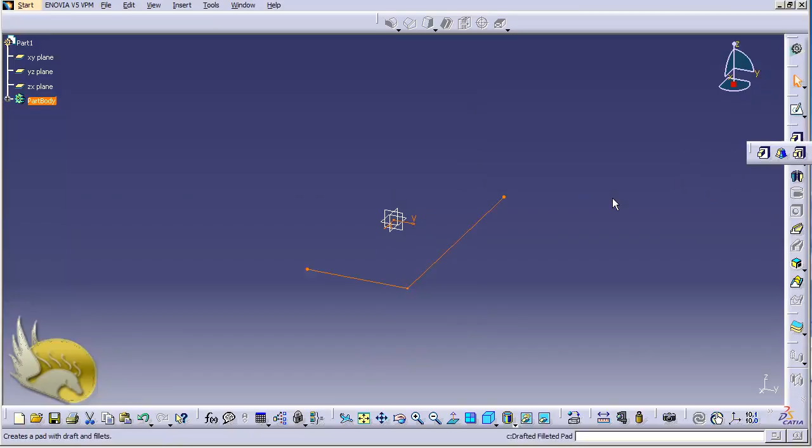Now let's see how we can use padding to add some material and take this to the third dimension. I go and click on Exit Workbench right here. Whenever I start padding, you can see this dialog box that tells me I cannot pad this unless I select the thick option in the padding tool.

I accept to select the thick option by checking this, and you can see that now I have two different limits. Now I can add the first dimension, about 20 millimeters. That's okay for me, and you can see the selection is Sketch 1. In the second limit, I want to have about 20 millimeters, and you can see that this goes to the downside.

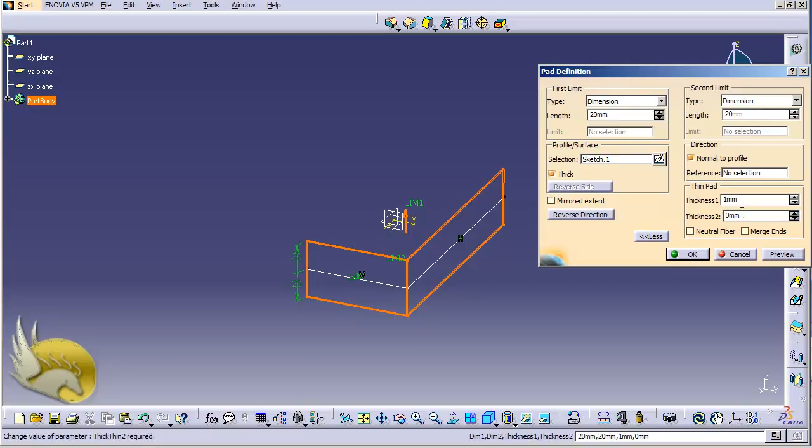But the thickness is very important here because we are creating a thick profile, so I can add thickness in two directions. The first thickness is in one direction, and I'm going to have this about 5 millimeters. I can add the second thickness in the other direction. You can see that this is going inwards, and I'm going to have about 5 more millimeters outwards.

You can see that I have an indented line that tells me this is the profile I have, and I have thickness in both directions. This is not necessary, of course, to have thickness in both directions, but I prefer to have this.

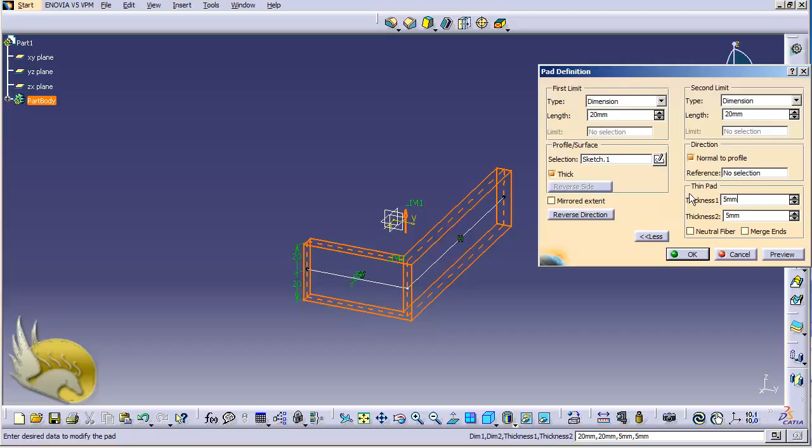You can see that I click on OK, and now I have something like this. The second thing I want to tell you is this: if you select a closed profile, you will get a solid, meaning that object is a filled object. And if you select an open profile, you will get a surface. I'm going to talk about surfaces more in the upcoming sections.

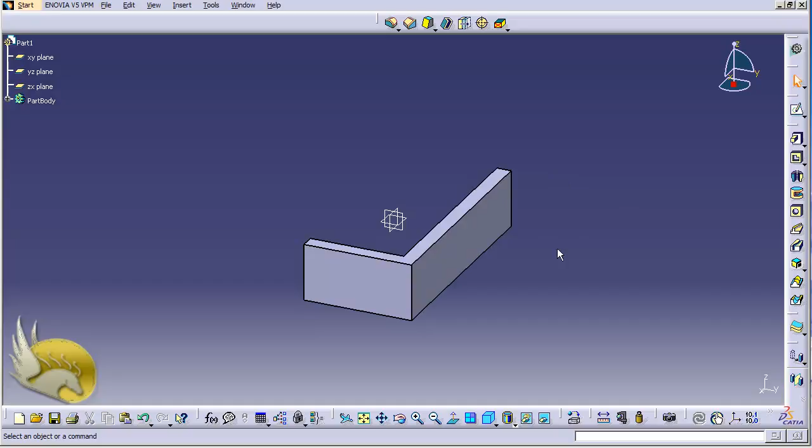Okay, now that I have this, I want to remove it and go to Shaft Tool. I'm going to the XY plane again using the sketch button, and now I'm going to select one axis. I have used axis previously. As I told you, I cannot use axis as a construction object.

That means I cannot use it to create any object or any 3D object from that. This is just going to act as an axis. So I click here and draw an axis here, and the length of the axis is not important. The angle of the axis, I want to have it vertical.

You can see that this is selected, and I can go to Constraint Define and make this vertical like this, and some constraints are applicable on this. So I click OK. And the second thing I want to have is this.

I want to have a rectangle right here, for example, like this, and I want to use this rectangle to have a shaft out of it. So I exit my workbench.

You can see that this is selected by default. I select the Shaft tool here, and now you can see that it recognizes the axis I had created previously, and it uses that axis to round it. You can see that I have again first angle and second angle.

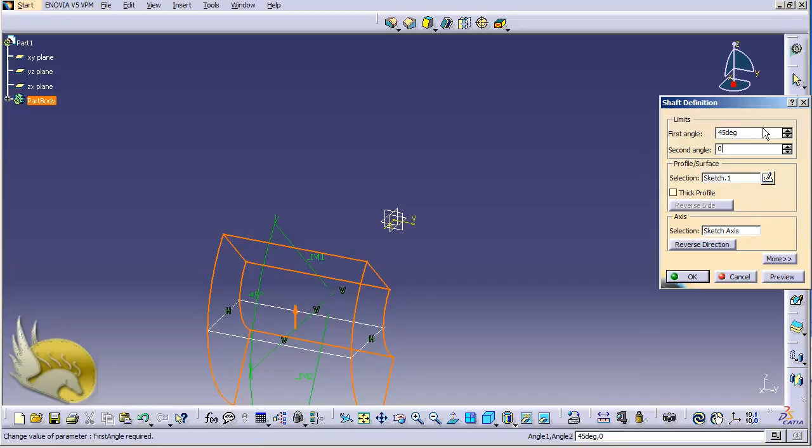These are identical to the first limit and second limit. That means I can have an amount of degrees in one direction. For example, I want to have 45 degrees in one direction, and I can have another amount of degrees in the other direction, for example 60 degrees on the opposite side. So you can see that I can have this, or I can have a full round using 360 degrees of rotation around the axis I had previously.

Now I can select other things as axis. For example, I want to select something else. I can right click on the selection, and you can see that I have some of these axes available here. And of course, if I had something else like the line of the rectangle, for example this line, I can select this. Let's check this—for example, I want to select this sketch axis.

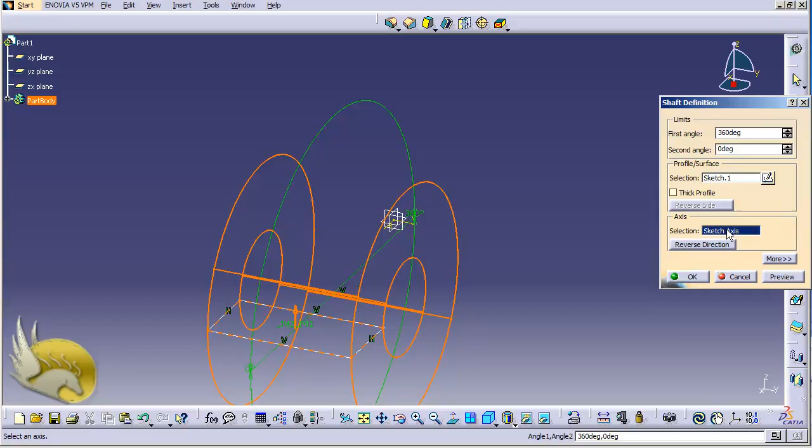I go to select this line. You can see that this is going around itself. Or I can make the selection highlighted again, and go to this V direction. I can see that it goes around that.

I want to have the axis that I had previously here, so I go and select that axis. You can see that it's not possible to find it. I can go to part body and open the sketch to find the axis, which will be under geometry. I can open this, and because the axis is named line, I need to find the line that is working as the axis, which is a little hard to find.

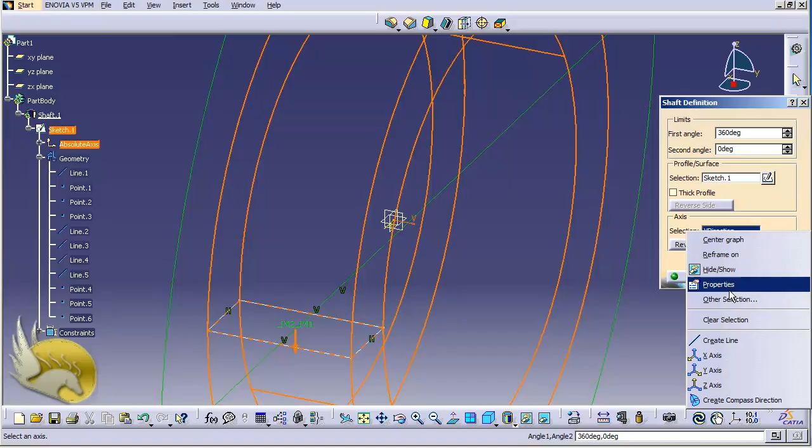So I go and find it. You can see that it's hard to find. I just go and select the axis here. I can clear the selection, and you can see that the axis is the default thing it uses for its rotation. So I click OK, and now I can see that my shaft is here.

Using the shift button and left or right arrow key, I can rotate around this, and you can see that this is exactly the thing that I need to have.

Now I can have something removed from this. So for this, I go to the XY plane again, go to sketch environment again, and you can see that I have this here. I want to draw a rectangle here like this, and now I can cut some of the shaft that I had using the groove tool.

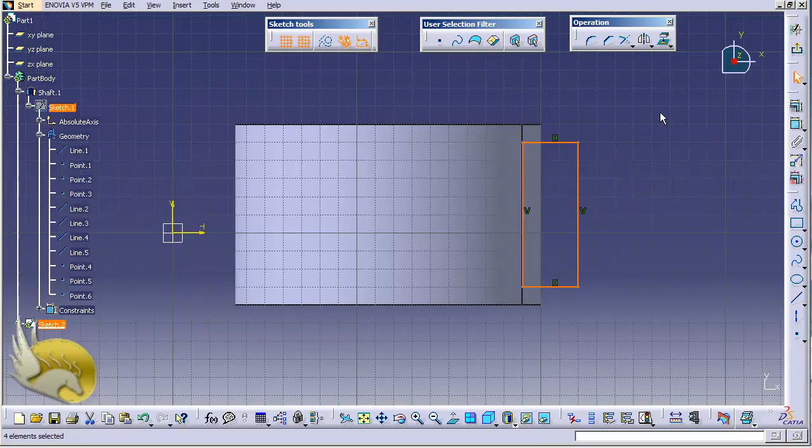I can exit my workbench. Groove works exactly like Pocket, but on a round shape. So I select the groove. You can see this under shaft, or you can go to insert and dress-up features and find it there.

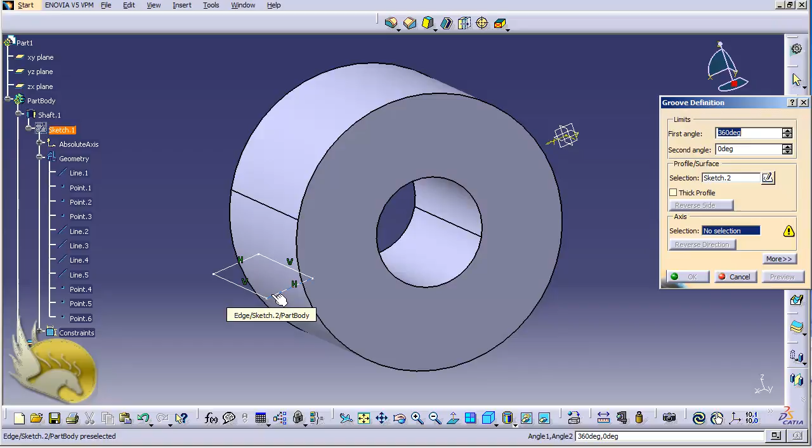No, this is not here. A sketch-based feature, I guess. Yes, this is here. You select the groove option, and it asks for the profile as the sketch I've selected here - that's the profile I need to use for grooving - and the axis.

I should select the axis, and this is the axis I want. Whenever I hover my mouse over this, you can see the shaft. I can find the axis and click on that.

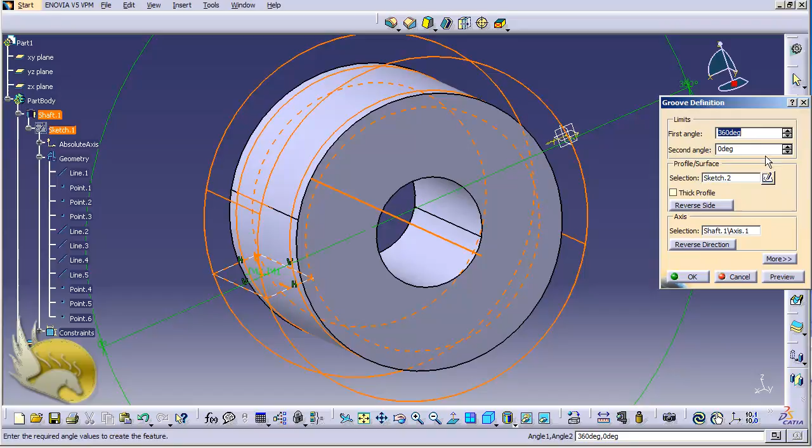You can see that it goes a full 360 degrees, unless I want to have it less, or in two directions with different amounts of degrees. This is okay for me, so I click OK. You can see that I have a bobbin-shaped thing right now.

So you have shaft and groove, exactly like Pocket and Pad, but on round shapes. Let me show you another example.

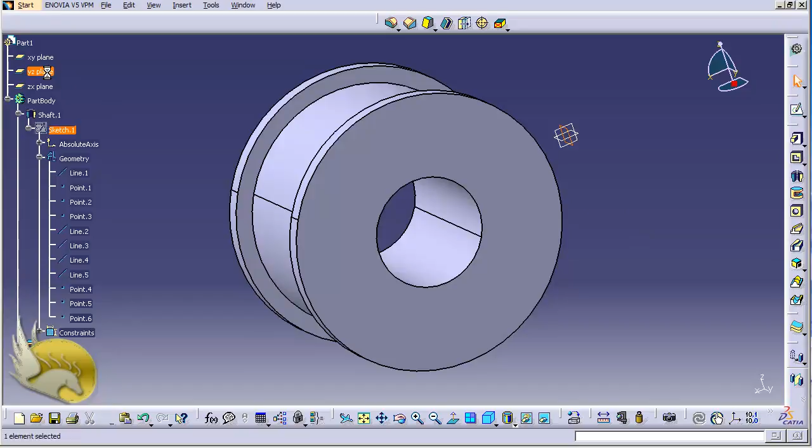I want to go to the YZ plane now and go to sketch environment. Now I want to add an axis here. Again, the axis is good to work with because it's a non-construction object. I want to have an ellipse here, and an arc, using a simple arc. I click somewhere on the axis.

I go to have the radius this much. I select the first point here, and now the second point - I want to have it aligned with this. So I can select this point, select this axis, and select coincidence like this. But I cannot have it like this.

Okay, no, I don't want it. I want to draw it again. So I select this, I select the center somewhere on this, I want to have this here, and the second point is going to be here.

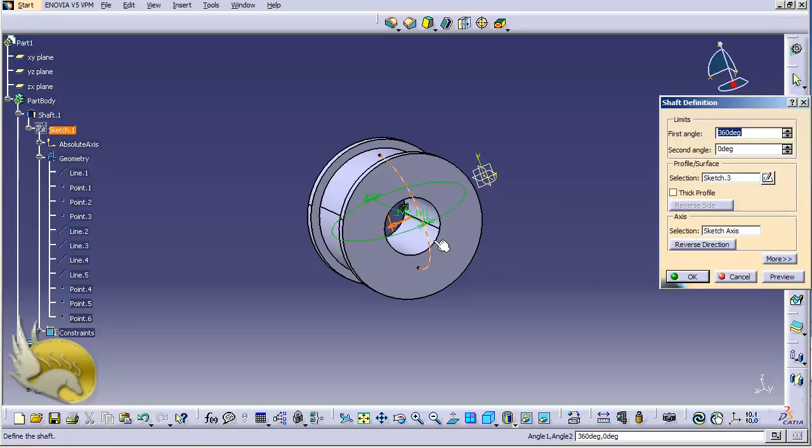Now I have a semicircle, of course. So I exit my workbench and use this for shafting. I select the shaft tool. You can see that it runs around the axis that I have created. So I click OK.

You can see that this doesn't work. Why not? Let's see. No, it actually works very nicely. You can see that I have a globe right now.

And this is a very nice globe, and you can see the sketch is still there. I want to hide it - I don't want to see the sketch. I can right-click on the sketch and select hide, so you can see the sketch is there. Of course, no, it was hidden. So I want it to be hidden again.

So everything is working okay right now, and I've used different profiles to create different types of shafts and grooves.